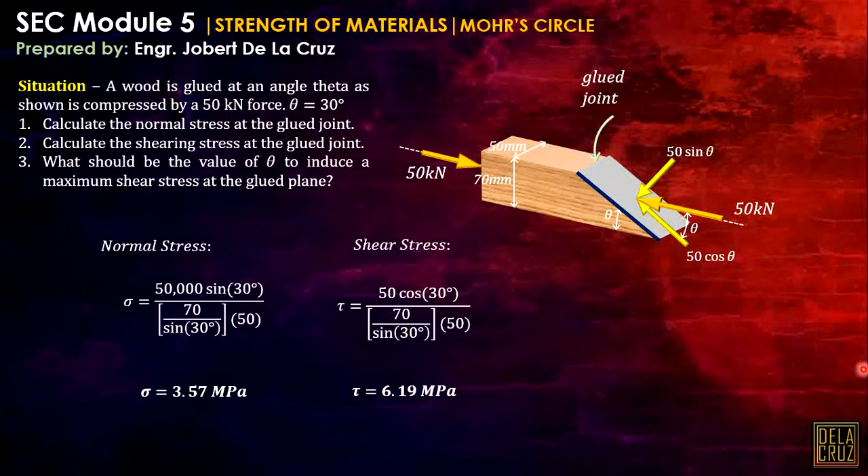Now, I will show you another attack using the Mohr circle. Pinakita ko to para ma-differentiate natin yung answer mamaya, para makita nyo talaga kung anong kagamitan natin sa Mohr circle. Okay, so ibalik natin siya sa original figure. So sa Mohr circle, since this is an application, we will consider a differential element dito or a small element lang. But to begin with, yung Mohr circle natin will be plotted like a Cartesian plane. Mamaya makikita natin.

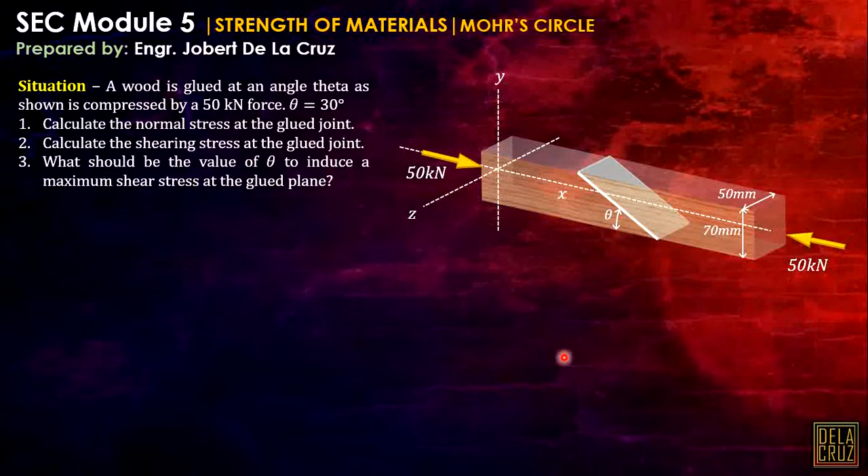So first, we should assume x, y, and z axis. Sabihin natin ito yung x axis natin, y axis, and z axis. Kukuha tayo ng isang strip element dyan. And since 3D ito, 3D element siya, na mamaya makikita natin na ma-simplify natin into a 2D plane stress element. Okay. So, ilabas ko siya. That one. So, these are the axes.

Now, this is the stress we will plot. The stress on this face is yung stress natin along the x axis. So what would be the stress on that? That is 50 over this area lang. So, let me just call this one sigma x muna. Then, dito, sigma y, stress along y. Then, in this axis, sigma z.

So, itong stresses na ito sa cube element natin, ipa-plot natin sa Mohr circle. To do that, ito yung axis ng Mohr circle. But sa Mohr circle, hindi na siya x and y axis. The normal stress na dito yung abscissa natin. Now, this vertical axis or the ordinate will be called the shear axis. Positive shear is plotted downward in the Mohr circle. Plotted downward.

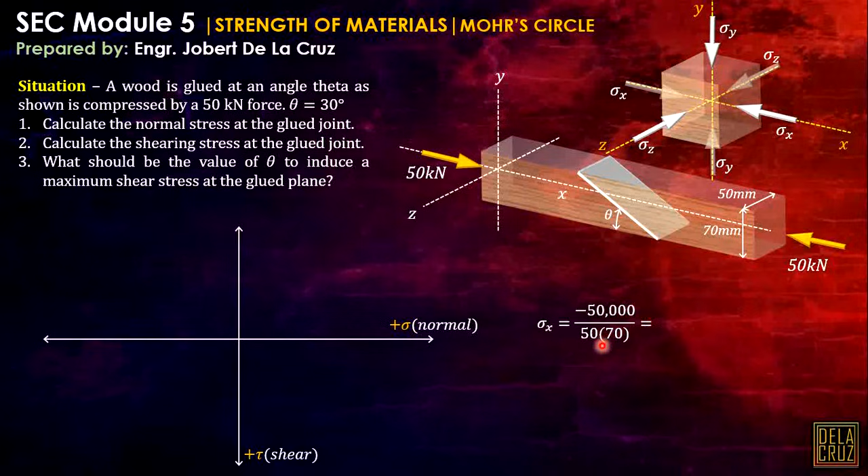Now, ano yung stress dito sa x? Along x. So, yung stress in this plane, okay, tingnan nyo, this plane. That plane will have a compressive stress, 50 kilonewtons over this area. So, negative 50,000 divided by that area, and we have negative 14.29 megapascal. So, consistent tayo sa unit dito kasi ipa-plot natin siya dito. And magmamatter yung sign.

Now, the shear stress naman, pag merong normal stress dito sa element, then we should account the shear stress always, kasi magkasama sila dito sa ating Mohr circle. Now, the shear stress dito, of course, walang magpapa-shear dito in this vertical plane. So, automatic, the shear at that plane, tau yz, tawagin ko siyang tau yz, nasa yz plane kasi siya, equals to 0.

Now, the stress along y, as you can see on the original figure, walang force na involved along y-axis. That means, 0 siya. And of course, our shear here, automatic 0 din sa plane na ito. Kinonsider natin itong small element lang, or differential element. Now, along z, sigma z is also equal to 0. Walang force along the z-axis. And the shear on this plane is 0 pa rin.

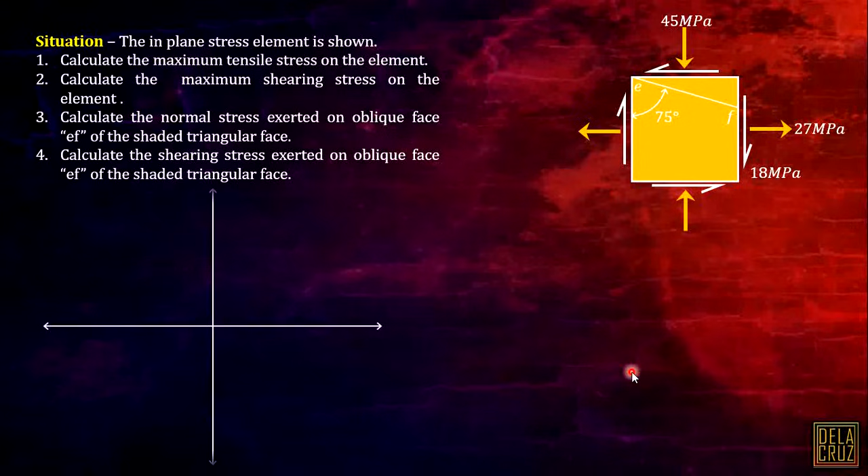Okay, so, binigay yung in-plane stress element. As you can see, kanina, yung element natin is 3D. In this case, simplified na siya into 2D, isang face na lang yung i-analyze natin. So, in this stress element, calculate the maximum tensile stress on the element, maximum shearing stress, the normal stress on this plane, and the shearing stress on that plane. So, i-plot natin yung Mohr circle. Again, dito yung normal positive and shear positive sa baba. Isa-isahin natin. Ano yung uunahin natin?

That one, 27. Unahin natin yung along this axis. Okay, the horizontal axis. So the normal stress here, ito, that is 27, located dito. And the shearing stress here is 18. Okay, 18 siya. Now, ito yung sign convention sa shear. Pag titingnan natin ito, diba, this 18 will create clockwise.

So yung clockwise will be negative in the Mohr circle. And the negative is plotted upward, sa itaas. Okay? That's why ganito siya. Negative 18, that will be going up dito. So I hope you don't misunderstand this one.

Now, another stress to be plotted is along the vertical axis. So this shear nga pala, yung shear natin dito, is equal lang sila lahat. 18 sila lahat. Kasi pag 18 ito, to maintain equilibrium along vertical, 18 din ito. To maintain equilibrium, kung walang kokontra dito, it will create couple moment. That's why may another 18 and 18 shear stress dito para i-account yung clockwise moment. Always yan.

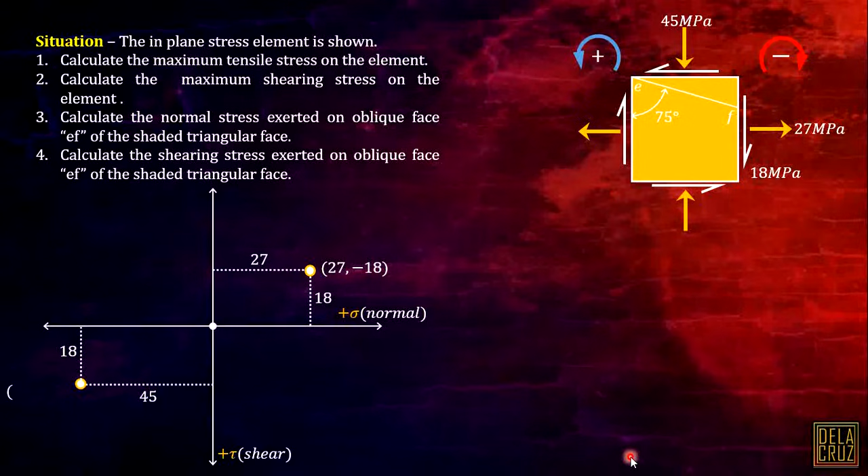Now, if i-plot natin tong dalawa, or i-connect natin yung line dyan, yan yung magiging diameter ng ating Mohr circle. So ito yung Mohr circle natin. This is our diameter. And to begin with the center, i-solve muna natin yung center. Kakailanganin natin yan. Ito yung center ng ating Mohr circle. Of course, these are the radius. Let's say that is C.

So almost lahat naman siguro yung center will be having a normal stress lang, walang shearing stress. So that will be the coordinate of the stress here, 27, plus the coordinate of the stress here, negative 45, divided by 2, and that is negative 9. And disregard na lang the shear, kasi hindi natin yan magagamit. Automatic naman talaga yung center ng Mohr circle natin will be at the horizontal axis. Ito yung ating coordinates of the center.

Now, after that, we will solve the radius. So how can we solve the radius? By the way pala, yung stress sa ating Mohr circle kung saan walang shear stress. So in this case, at this point, walang shear stress dito, and also at that point. Yan yung principal stresses natin. Purely axial stress lang yung na-induce niya. Ito yung principal stresses.

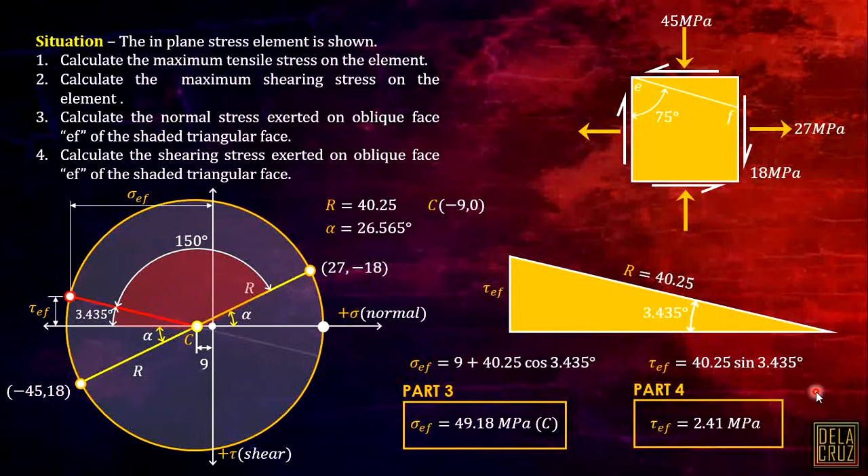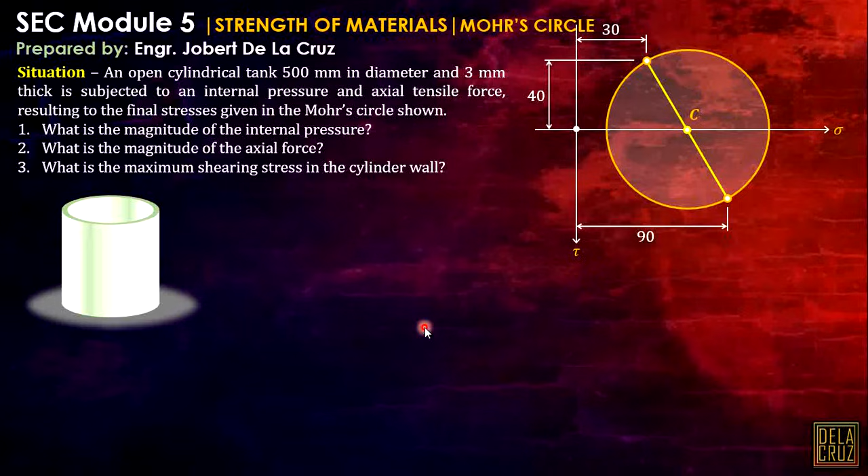So, another example pa, board exam problem. So, sa board exam na to, binigay na yung Mohr circle natin. Okay, we are to locate lang these stresses. Okay, so, an open cylindrical tank, 500 mm in diameter, and 3 mm thick is subjected to an internal pressure and axial tensile force, resulting to the final stresses given in the Mohr circle. Okay, so we have the 500 mm open cylindrical tank, no? That one. Ito yung 500 mm diameter and thickness of 3 mm.

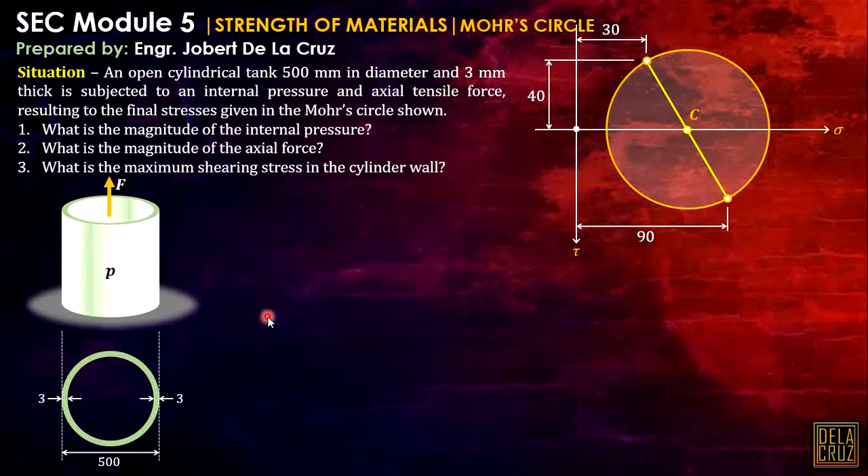So as you can see, this is a thin-walled pressure vessel. Okay? So subjected daw siya to an internal pressure dito sa loob and axial tensile force. That means we have the pressure here at meron din tayong force dyan. Tensile meaning palayo. Okay? So these forces and the pressure will induce stresses that represent this Mohr circle. Okay, so that pressure here will be distributed normally sa ating cylindrical vessel. Okay, so let's consider again an element dito. Okay, so I will just consider an element.

Now, we will plot the stresses. Okay, along this axis, ano yung stress natin dito? That will be force over the area. Okay, along the vertical axis, walang ibang force magpapa-induce ng stress dyan, kundi ito. Force over the area. So, tawagin natin siyang sigma 1, F over pi dt. Okay? And along the horizontal axis, ano yung magpapa-stress sa kanya?

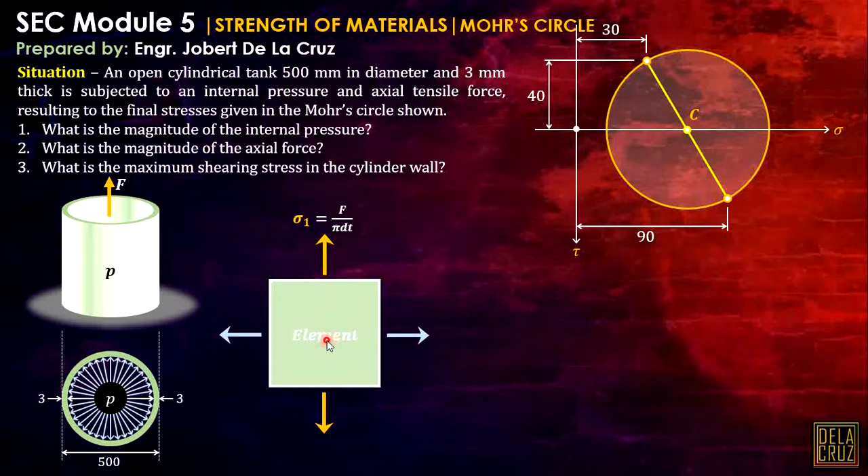Again, this is an in-plane stress element kasi we're considering the body of this ating vessel, no? Yung may stress siya dito perpendicularly but negligible yan considering a very small element. Okay, so ano yung stress dito? That will be the circumferential stress induced by this pressure P. Let's call that sigma 2. That is PD over 2T. Please remember that. Okay, circumferential stress.

May longitudinal stress tayo that is along this vertical axis. But as you can see, open cylindrical vessel to. Kaya lalabas lang yung pressure dyan towards the vertical axis. Kaya hindi natin siya maa-add dito. But if may case na sarado to or closed vessel yan, then i-add natin siya dito. Okay? So analyze that one.

Now, for number 1, what is the magnitude of the internal pressure P? Now, we will locate this one, sigma 1 and sigma 2. As you can see, on this plane, walang shearing stress. That means that these two are the principal stresses. And it can be located dito. Ito yung sigma 1, ito yung sigma 2. Okay? Klaro? As you can see, walang shear stress dito. Walang mag-create ng shearing stress dyan.

So, if this is sigma 2, then hinahanap is the internal pressure P. If makukuha natin yung stress dito, then equate natin sa PD over 2T, then makuha natin yung internal pressure P. So, how can we calculate this one? Consider natin tong right triangle na to para makuha natin yung radius ng Mohr circle. This is twice the radius or the diameter. This dimension here should be 90 minus 30, and that is 60. And ito naman, that should be twice ng ating 40, so 40 plus 40, kaya 80 yan. So, by Pythagorean theorem, we can solve our radius, and we have 50.